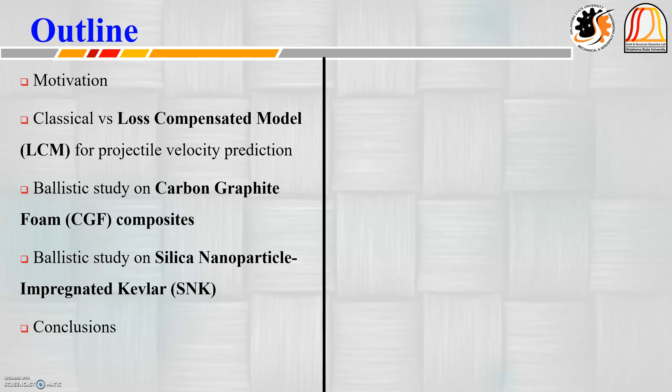Today, I will present my work on ballistic performance evaluation of carbon graphite foam and nanoparticle Kevlar composite using compressed air gun. This is the outline of my presentation. First, I will elaborate upon the motivation behind this study. Then I will move to the model I developed and its verification. After that, I will talk about ballistic study of carbon graphite foam and silica nanoparticle impregnated Kevlar respectively. At last, I will draw some conclusion.

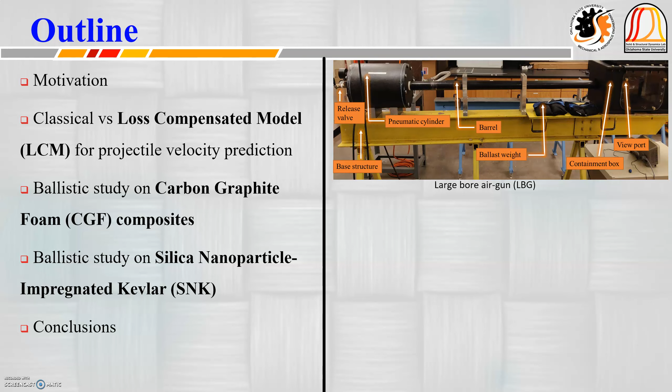We have used two compressed air guns for our study. One large bore air gun having bore size of 2.5 inches and another one is small bore air gun having bore size of 0.45 inches. You can also see the picture of the high-speed camera that has been used to evaluate the projectile velocity throughout all the experiments.

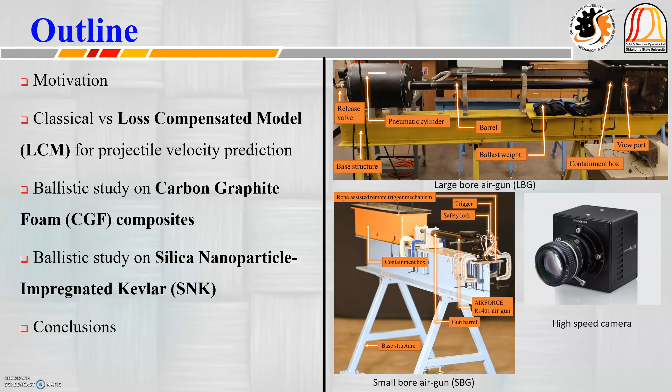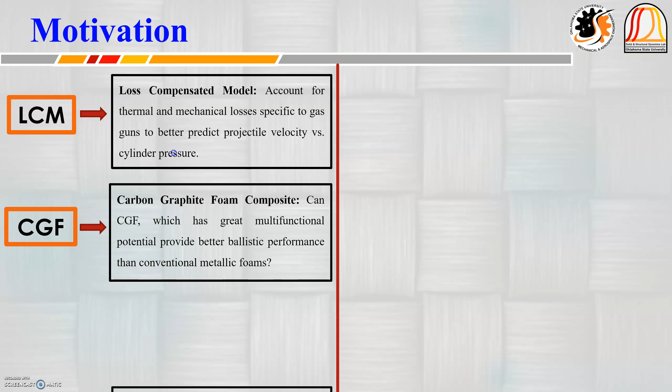As this study is threefold, I'm gonna present the motivation behind this separately. The motivation behind developing a new loss compensated model is that this will give me a reasonable bound on the velocity data analyzed from high-speed camera. As for the CGF study, I look forward to analyze whether carbon graphite foam, which has great multifunctional potential, can also provide better ballistic performance or not. And SNK study is motivated by the aim to make Kevlar ballistic vest lighter.

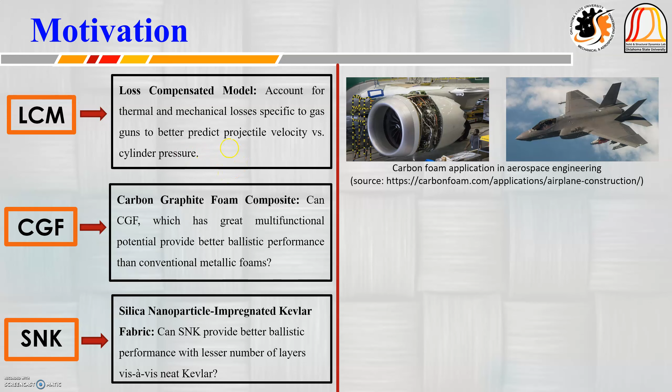Earlier, people used leather vests, which were prone to knife attack. Then came chainmail to overcome that problem. Later, the invention of the bullet forced people to use steel armor, which was heavy. In recent times, Kevlar replaced heavy steel, but multiple layers of Kevlar makes the armor heavy again. SNK study aims at reducing the weight of Kevlar-based armor.

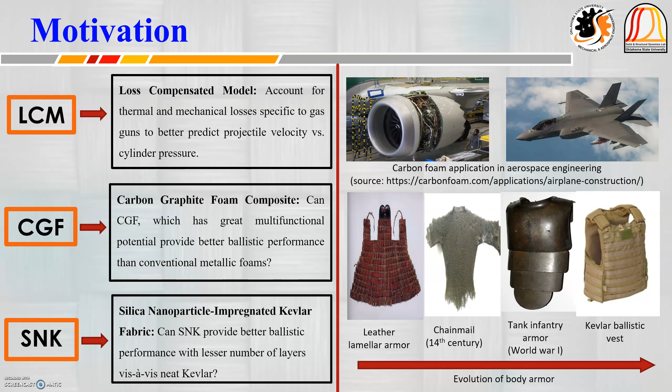Before talking about the newly developed LCM, let me introduce you to some of the classical models that we have from the references. First one of these models is the isobaric model, according to which the air pressure behind the projectile will be the same even though the gas will expand. But clearly that will not be the case. That brings you the next model, that is the adiabatic model, which assumes the state property of the gas behind the projectile will be uniform and not gradient.

But as the gas is expanding very fast, there could be a gradient of state properties, which was later considered in Lagrange's model. Lastly, expanding this idea of property gradient, Pidduck and Kent considered that there will be a region of vacuum behind the moving gas. Point to be noted that none of these models considered any of the thermomechanical losses other than the friction between projectile and the barrel.

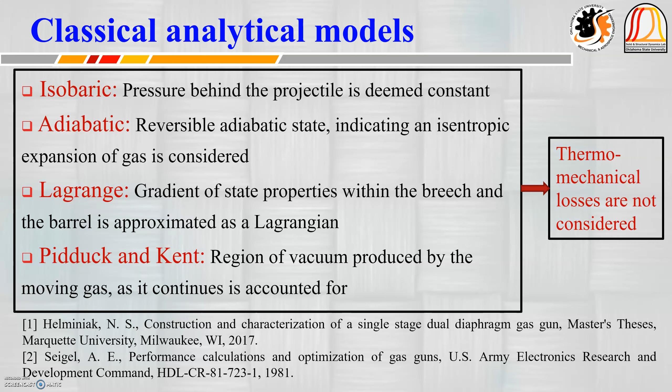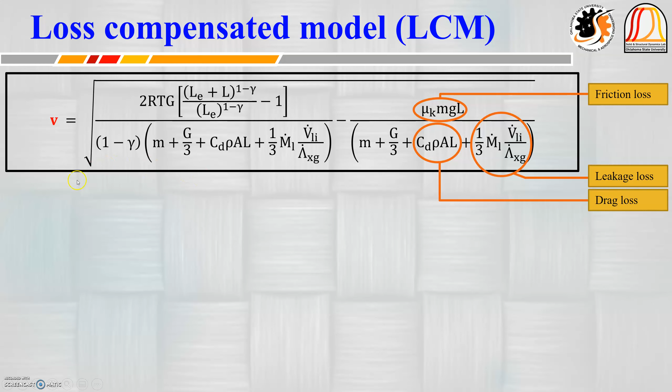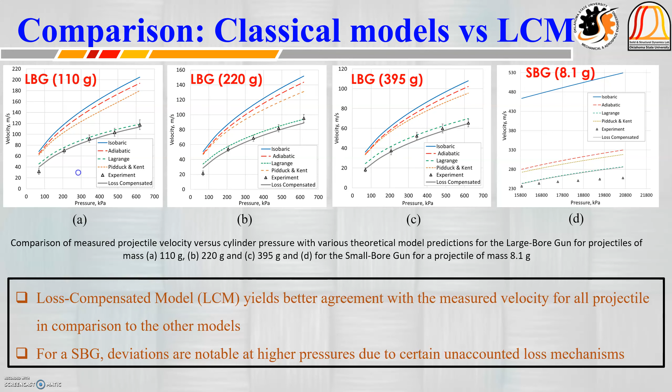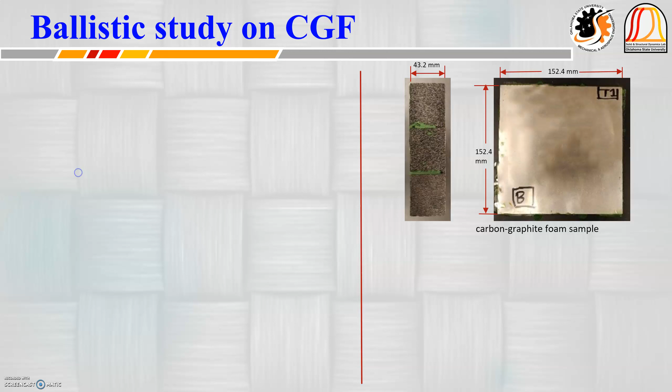Here I will talk about the ballistic study on carbon graphite foam. In the right side picture, you can see the carbon graphite foam ballistic and baseline aluminum foam test articles. And on the left side, this process has been described.

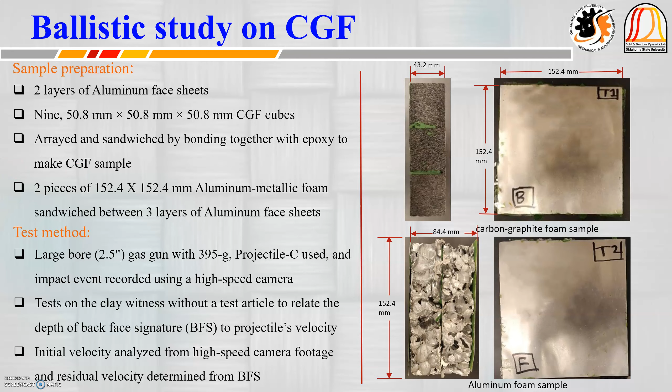As per the test method, first the sample is placed against clay witness and backface signature data on the clay witness is recorded after each penetration of the sample. Then BFS data is recorded for impact test on clay witness without the sample. This BFS data is plotted against the velocity of the projectile. This relationship is used to find the velocity of the projectile in case of impact test with sample placed against clay witness.

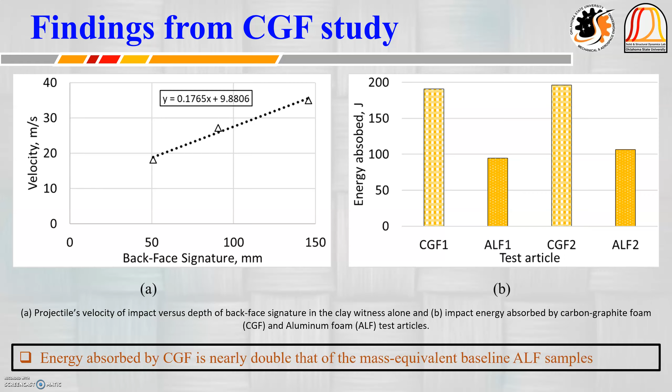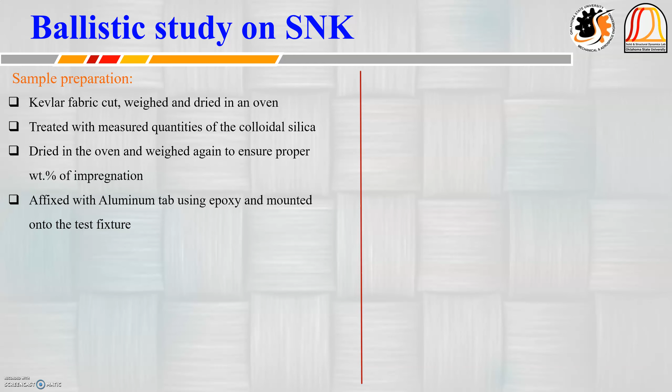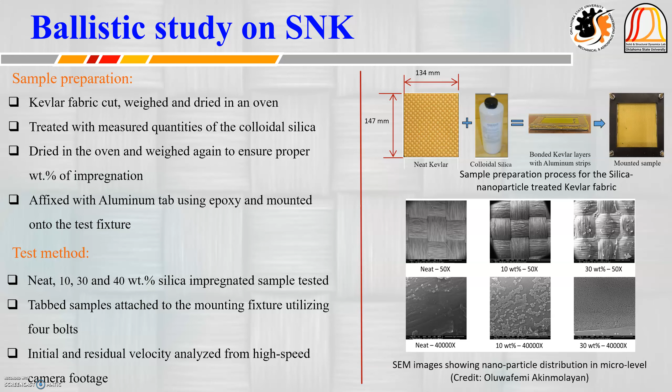The test method is similar to the CGF study. The only difference is the residual velocity is calculated from the high-speed camera footage, not from the BFS data.

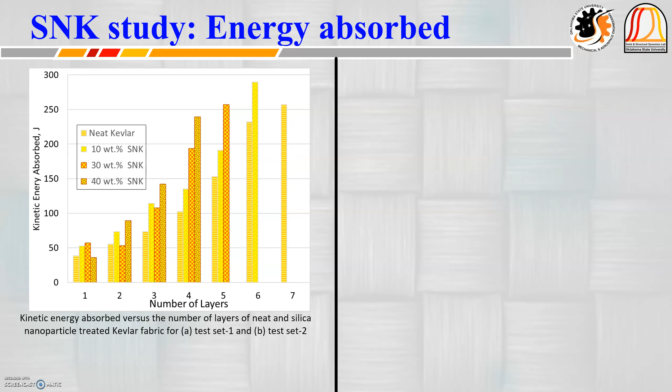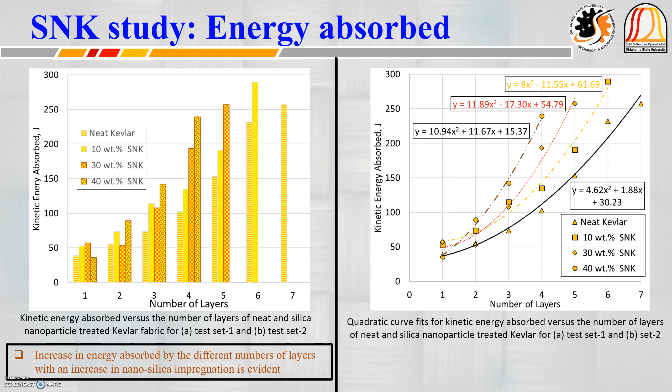Let's take a look at the findings from the SNK study. First, we'll take a look at the energy absorbed plot. From the left side plot, that is the energy absorbed plot, you can see the energy absorbed increases as the level of treatment increases. In the right side plot, the trend line of increase in energy absorption is outlined for different treatment levels. The trend line is found to become steeper with increase in treatment level, which implies with the increase in the level of treatment, energy absorption capacity increases more rapidly.

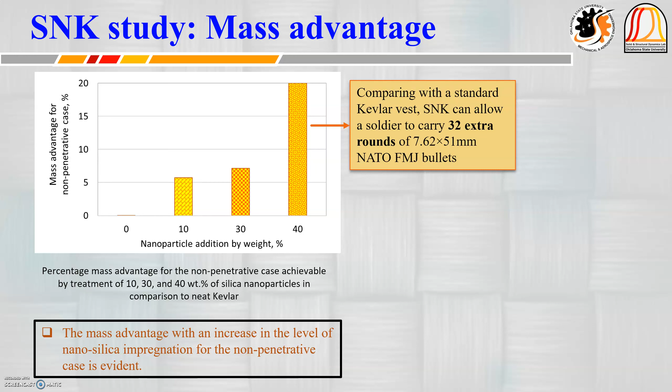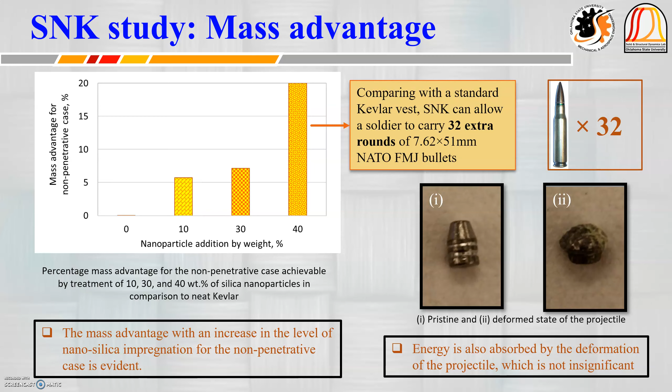As for the mass advantage, 40% of nanosilica impregnation will give as much as 20% of mass advantage in comparison to neat Kevlar, which can be interpreted as carrying capacity of an extra 32 rounds of 7.62 by 51 millimeter NATO FMJ bullets. In the bottom right picture, the deformation of the cast bullet used in the SNK study is shown. The energy absorbed in this process was not considered in this study.

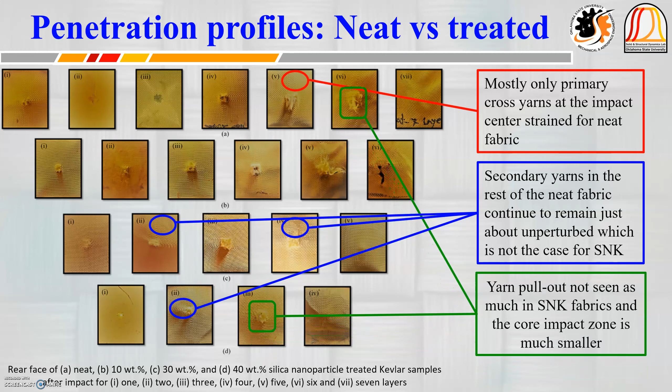Lastly, the penetration profile is shown in this picture. You can see mostly only primary cross yarns at the impact center are strained for neat fabric, but for the SNK, the secondary yarns are also strained. Yarn pull out is not that much in SNK fabric in comparison to the neat fabric.

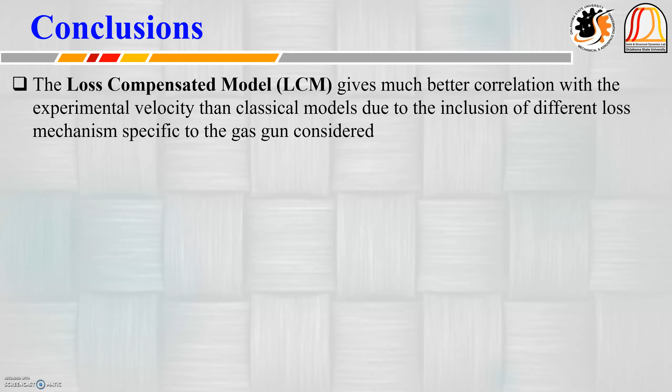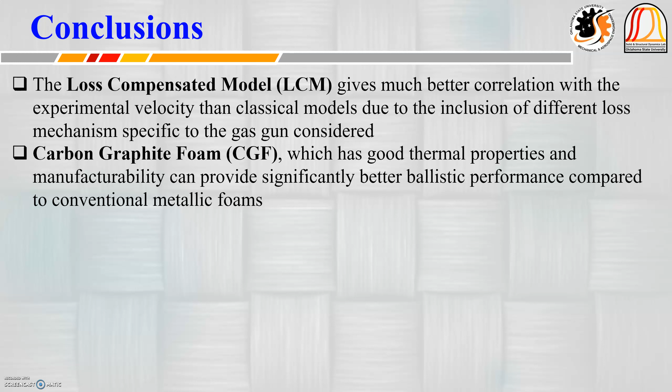The following conclusions can be drawn from this study. The loss compensated model gives much better agreement with the experimental data. Carbon graphite foam has better ballistic performance compared to conventional metallic foam. Silica nanoparticle impregnated Kevlar increases the ballistic performance, and further investigation is underway to gain more insight into the mechanism involved in the increase of the ballistic performance of SNK.